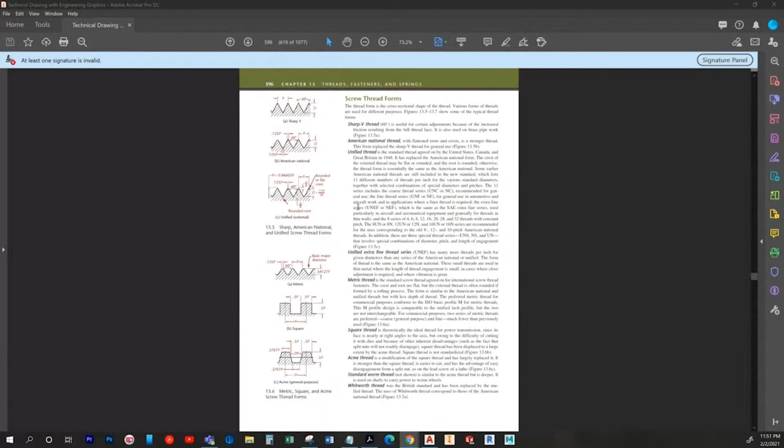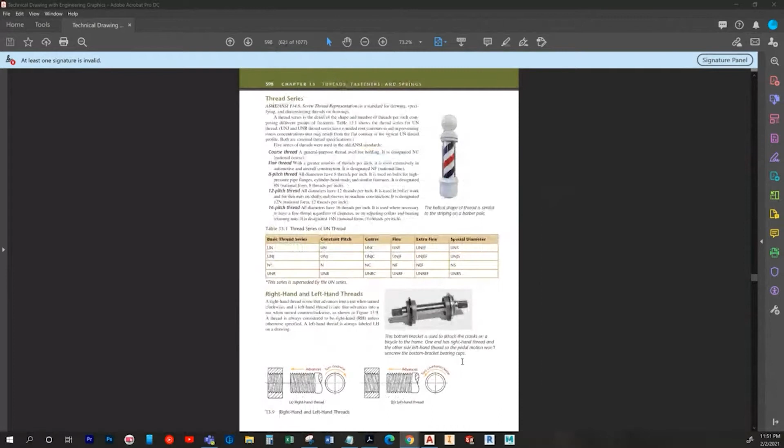So then I'm gonna go ahead and jump down. Basically, the principle is you're gonna have a pitch, and it's determined by an inch divided by the amount of teeth, which is given in the thread note. And I may have scrolled past that already. Let me take a look here.

Okay, so if you look here on page 604 - and it's probably best to specify this is the 15th edition book, so it's the newest one - you've got threads per inch listed here in the diameter, and that's pretty much all you're going to need to draw it most of the time. But there are other modifiers that matter, the class of fit, of course, blah blah blah - I have a video on that too. But for our intent, what we're going to do today, we'll just need the major diameter, threads per inch, and if it's left hand or right hand.

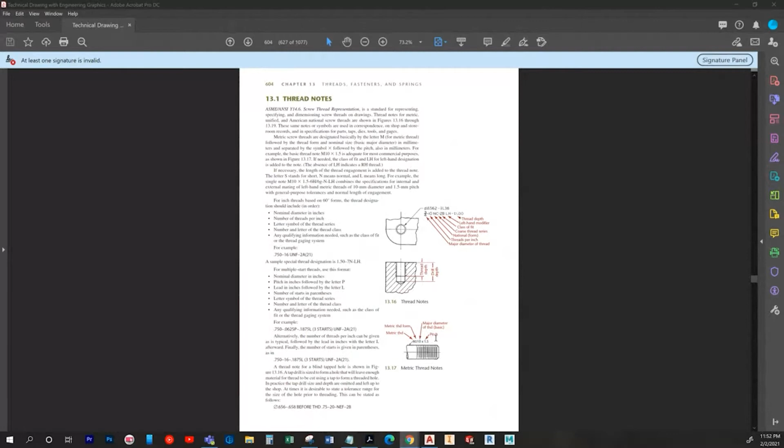And then there's a metric one broken down here as well. Now to go back up, this is pretty much just the gist of what it's going to look like. I don't know why in the book they wanted to flip it the other way and make it a little more stressing. If they would have had the 0.5 over here and the P over here, it would have been great. But I think they were trying to, since you read left to right, let you read what the actual lines look like first. But to me it just confuses it up.

But the principle here is on a standard screw, like a single thread or even a 3-start thread, a triple, you're going to have a profile drawn, and that same profile will be copied and pasted straight down. So then when you look at like a 2, or I assume a 4 if there was a 4, it's going to be the opposite - you're going to have a profile drawn up here, and then you're going to mirror it down here. So it really matters a lot about placement of these profiles in addition to drawing them.

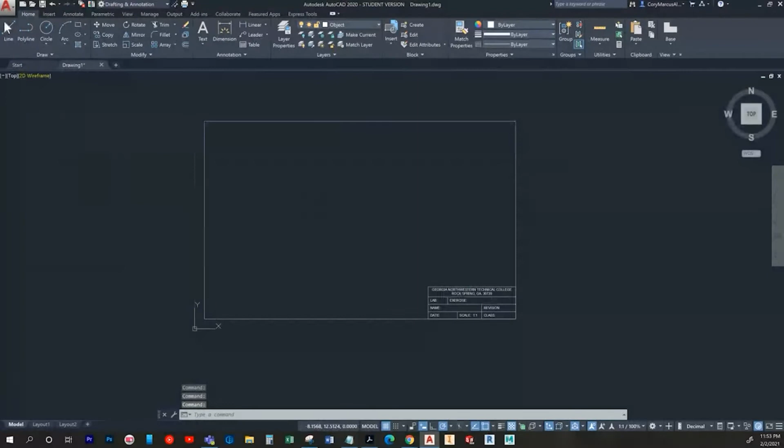And then after that, you're pretty much just connecting the dots. So let's go ahead and open up an Imperial template. I'm going to kind of just ballpark some values here, but the general idea is going to be the same regardless. So let's see, first of all, I'm just going to draw on a pretty good spot in the page.

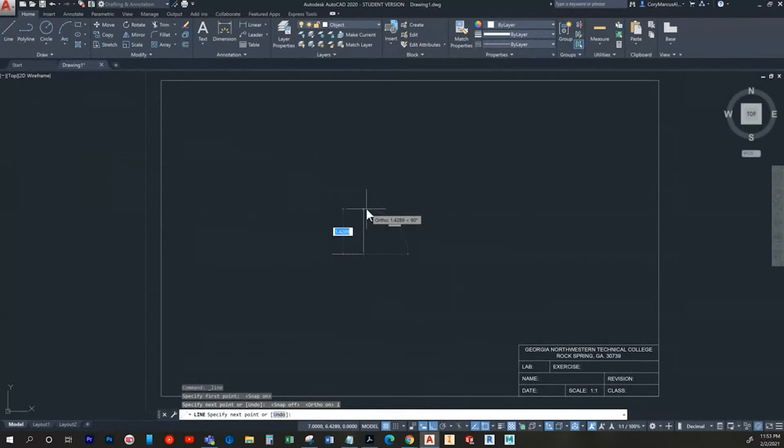And let's make it have like a shaft of 1 before we actually get to the part itself, and I guess like 2 inches by 1. So I don't know how some people draw the little breaks in a screw, but what I like to do is take that value of whatever it was - oh, you know what, I'm on the wrong arc.

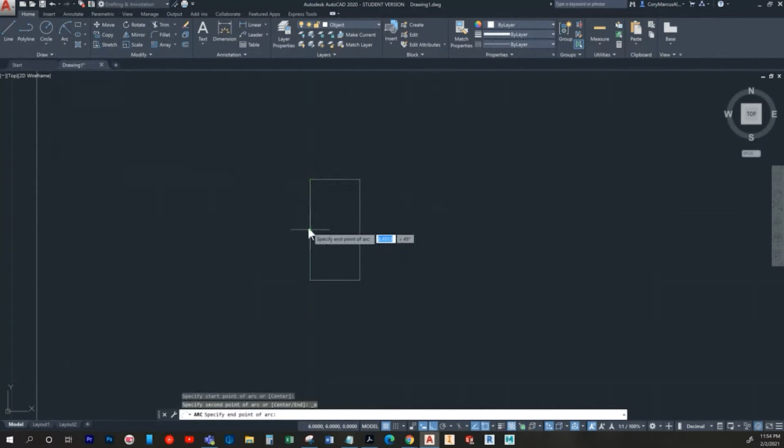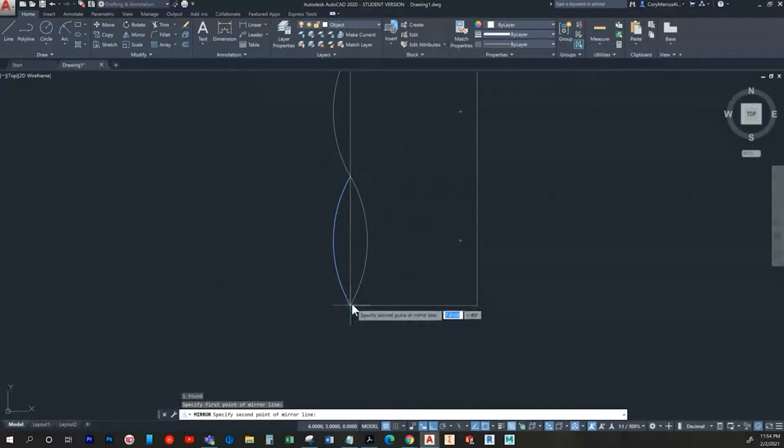Okay, so I'm looking for start and radius. So what I like to do is take the radius value of that thing and use it - that way it has like a perfect transition. And then just mirror this one down here, and you can delete this line out. Then later we'll hatch this portion. But basically, yeah, that's just a smooth break because the transition is not sharp.

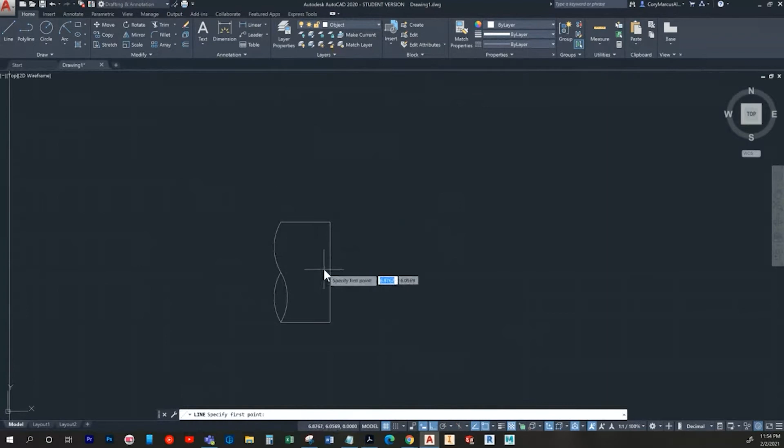Now there's probably a better way to do that, but this is the best I've found, and that's just a guess really at what's the standard. Okay, so let's do like a 4-inch length. And what did I make this to? We may as well just make it straight across.

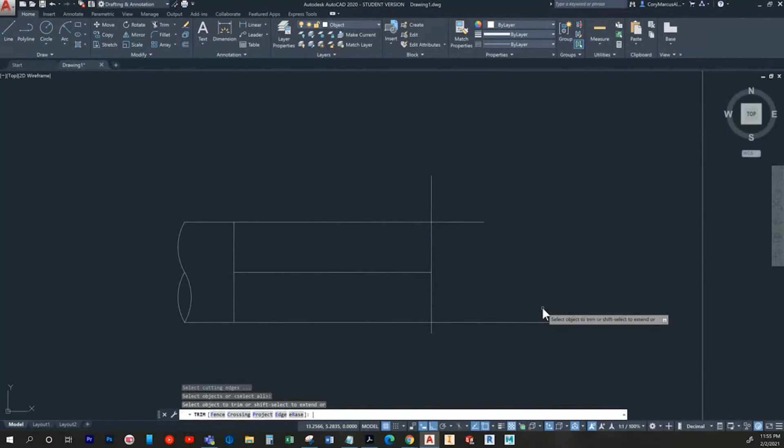Doesn't have to be, but for this one we'll make it this way. So I'm going to go ahead and trim and delete the center line that I made.

So I need to determine the thread pitch, by the way. Let's go ahead and do a generic note here. So what I'm gonna do is... let's see. I don't want it to be too small.

Okay, how about we do 4 threads per inch? Let's see how that looks. Or no, let's do 6. 6 TPI, threads per inch. Right hand, and yeah, that's pretty much it. You already know the diameter technically, but I'll put it down here. 2Ø. Okay, so that's my own note.

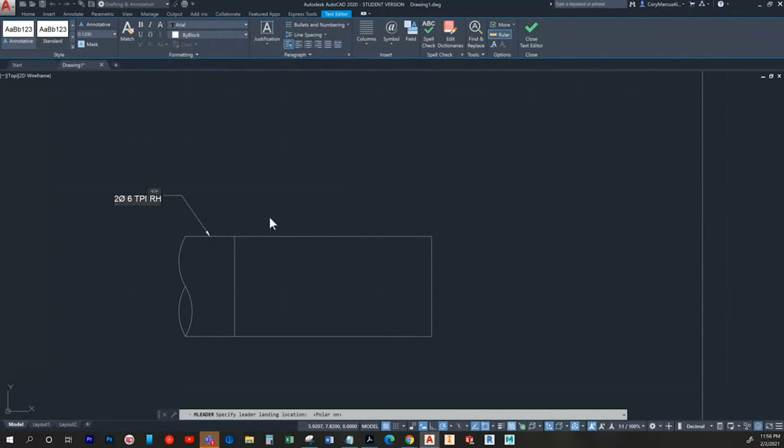Obviously, this is not proper nomenclature, but it lets you see what's going on if you're thinking about it. So anyway, I'm going to do a calculation here, first of all, and it will be 1 divided by 6.

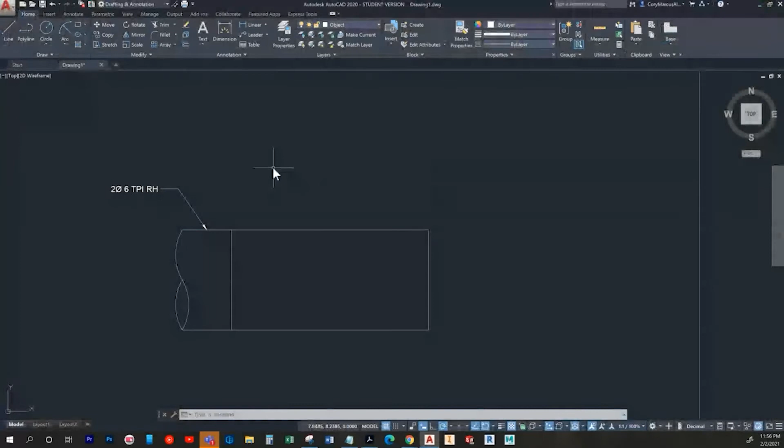So we'll do a couple decimal places. So we'll do 1.6667. How about that? Okay, and then I'm just going to... oh, bad maths. 0.16667. Okay.

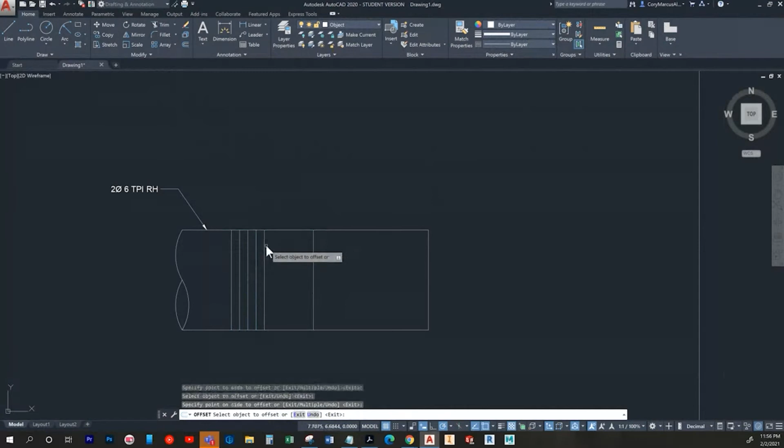Some people offset the lines outside of the screw so it's easier to delete, but I kind of like it being here. To me, it's a little easier not to get goofed up. That one seemed to line up perfectly, so.

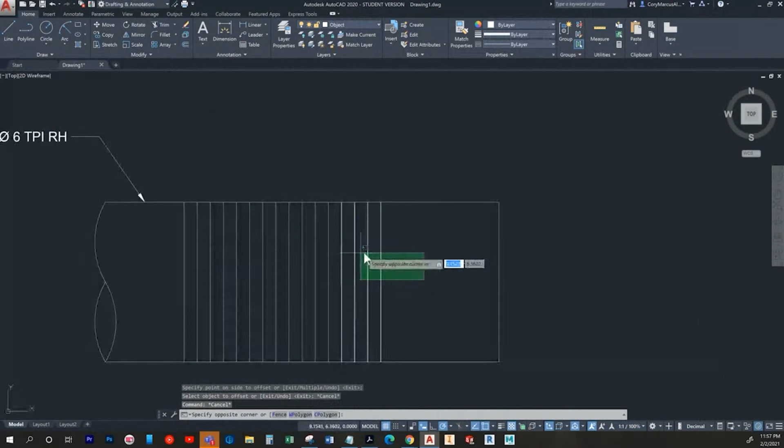Lots of these guys. I really don't need them. Honestly, I'm probably just going to delete them all, but it's fine.

So then what you're going to want to do, really I don't need that, is to draw the line connecting the two ends of that pitch. Make sure that you've got your snap set to 30s. And then once you get that snap, go ahead and draw.

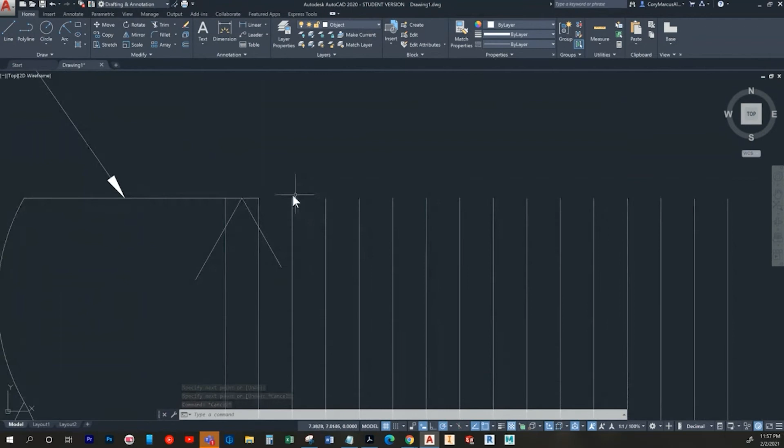And so that's going to be our minor diameter right there. So then... you know what? I think I've already blew it on my end. Let's see. Yeah, so, okay, I'm good. I was thinking that maybe it started at the middle, but it starts here.

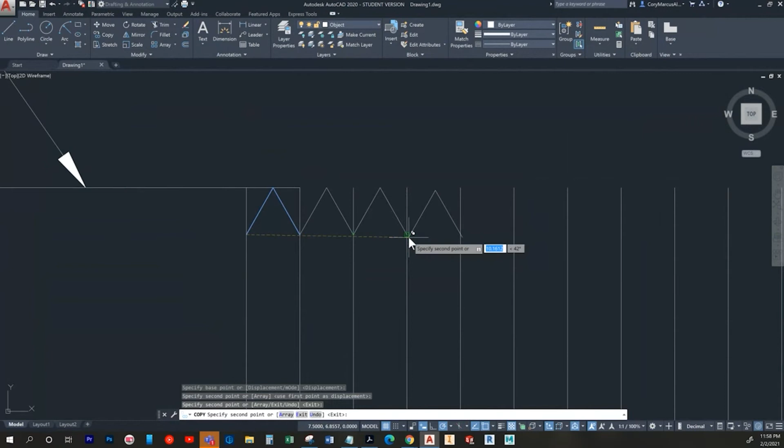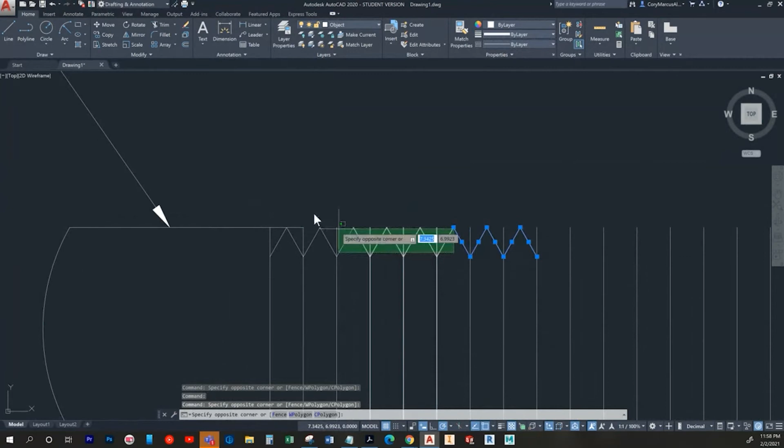So anyway, I'm going to trim. And then all I need to do is copy it. Might as well get a bigger selection here. And let's do the same thing one more time. You know what? We'll just do it the quick way. Hold Shift to deselect.

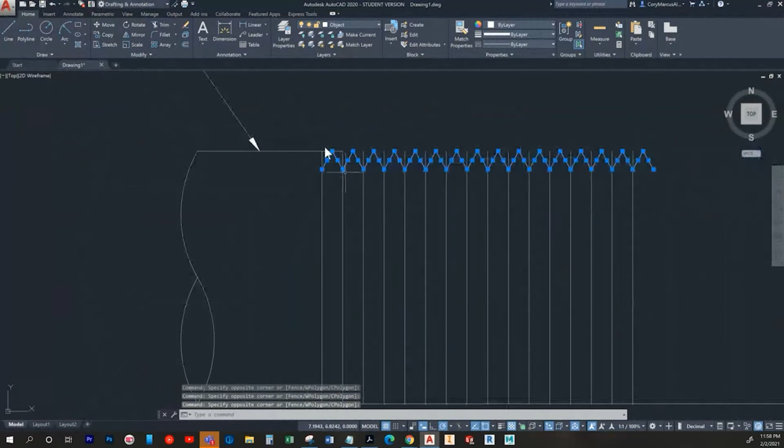Okay, so now if we look back, it slopes up and it slopes up. So this is what I was talking about earlier. All you need to do is just copy everything and move it straight down to the bottom.

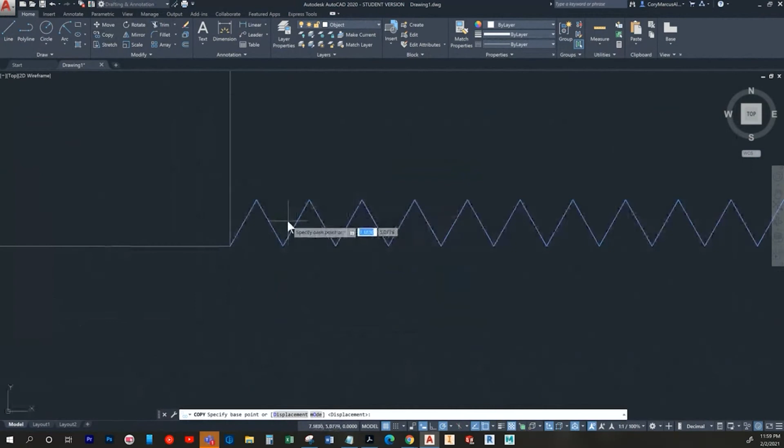It actually needs to be longer still. I didn't realize that. Okay, no biggie. So we'll just copy this whole batch. It's kind of a long screw. It's fine.

Let's shorten it by an inch. It seems like 3 is plenty. Can't tell if it's the same ones or not, but we'll find out. Oh no, I blew it. Okay, no biggie. We don't need that many anyways.

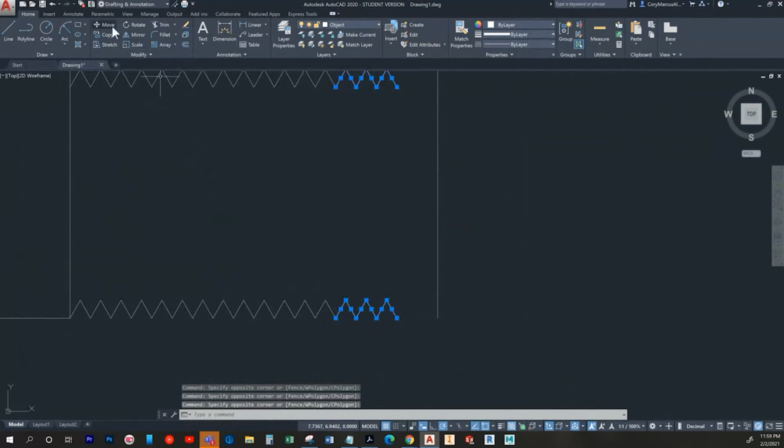Alright, so I'm going to delete this guy and that guy. And I'm not even going to bother to trim that right now because we're going to end up having a chamfer on this one. So if it's going right-handed, it's going to basically travel this way, and if it's left, it would travel this way.

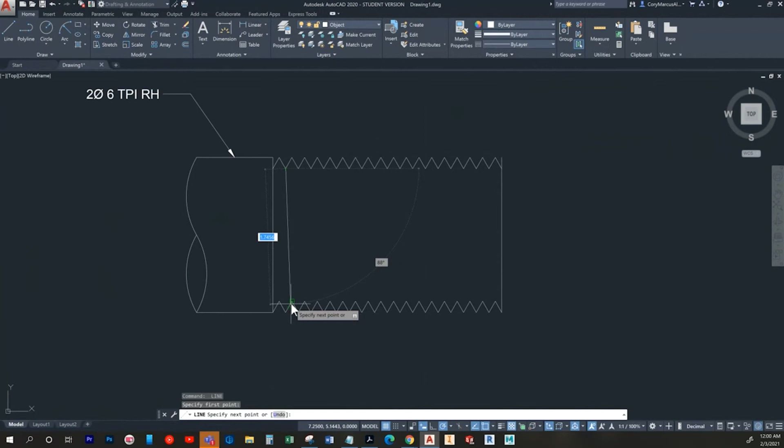The reason being, say I had a bunch of these lines like this, you can kind of tell if you're thinking about it. If this is rotating clockwise, it's going to be traveling along this path, getting further into it. Basically, it's literally traversing and digging deeper into it. So of course, this would be progressing forwards, which is the concept.

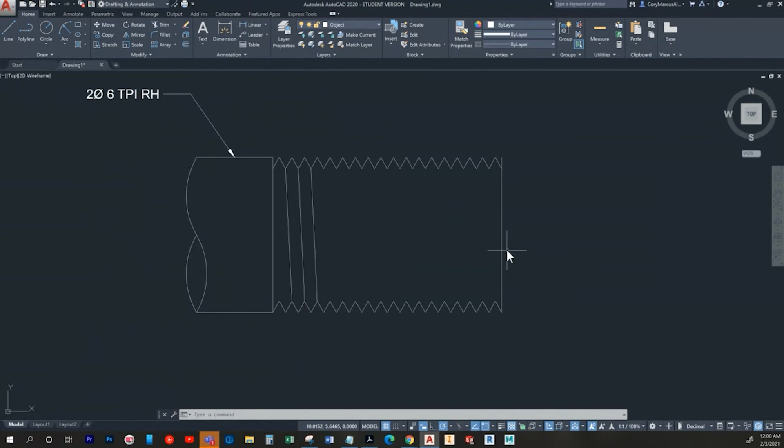So yeah, it's going to be positioned just like this.

So it's a pretty straightforward process. You're basically going to connect. Okay, let's look over here. Basically, this top point, you're going to connect it to the top point on the bottom.

If you were to draw a line straight down, you're going to be touching the point on this end, but then it'll be at the bottom here, and you need to actually connect it here. So technically you have the end here, but you can't see all of that. If you move to the next one, straight down is here, so you move forward half a pitch.

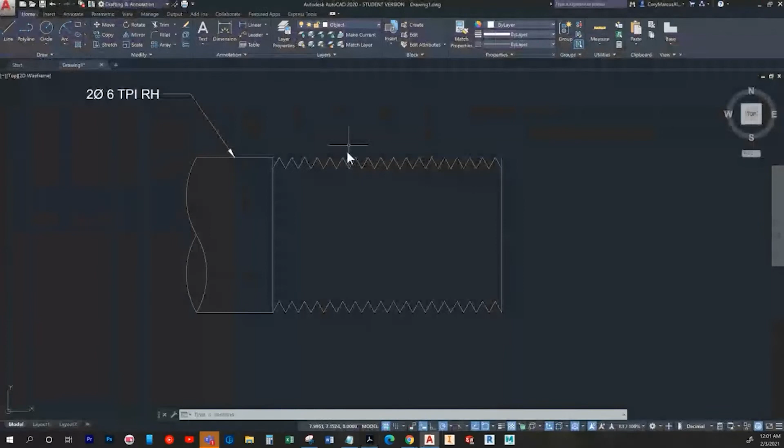So in this one, I could draw a straight line down. I can see that's where it would be. So this is where this one would connect. And the same concept applies with the roots as well. You're going to connect those in the same process.

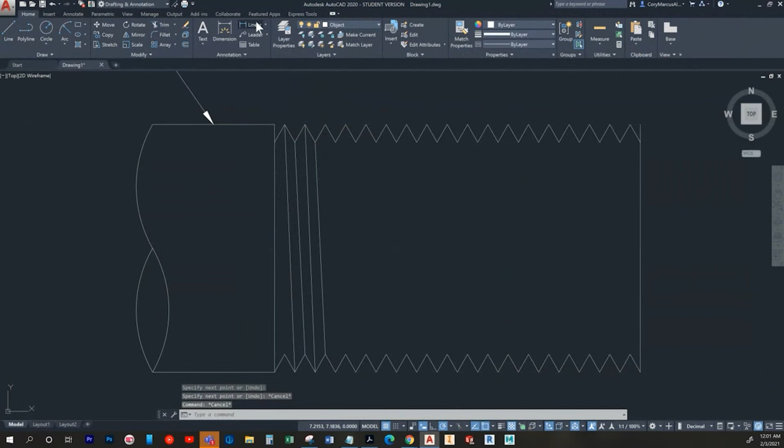Usually what I like to do—this one's pretty easy, so it's not really a scary one, and it's pretty easy to tell if it's right or not. But the best way to fact check and see if you're right is to dimension.

From that straight line, basically, we've got 0.0833, which is half of that 0.1667, whatever it was from earlier.

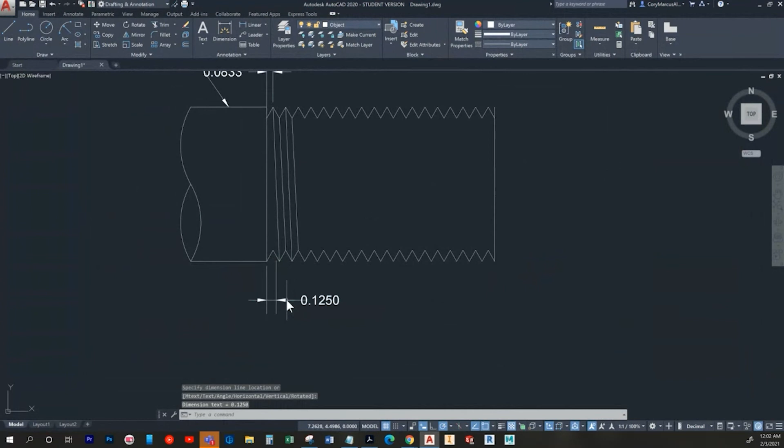From that same line, I can go to the bottom one, and you see it's—that was a bad click, guys—but you can see it's double that. So we have half of the pitch and the actual pitch.

So basically all you've got to do to fact check these is literally just measure from the start to the next one and see if it lines up. Your lead should always match this formula, and your start always should match that. Obviously your slope is the same way.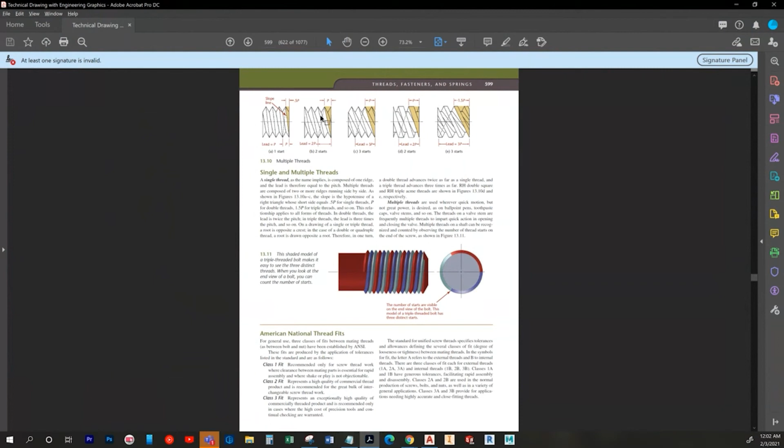So this is just on the back end. It's a hidden line for a reason. Basically, you could measure this on either end of the spectrum, but we've already measured it. It works out, so there's no reason for me to go and try to draw all of this again.

I'm going to do the same thing, just copy it across as we go. Oh, I think I pasted it a little too often there.

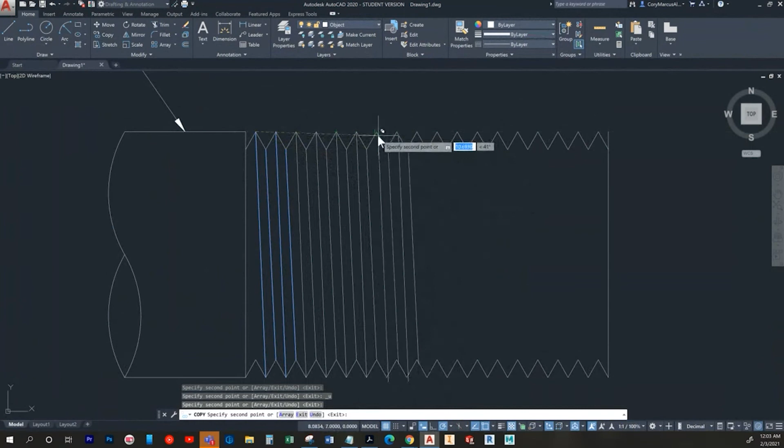Okay, so now I need to copy for this little portion right here. So I'm just going to copy. And this one's great because you don't have to do any trimming outside of the profile.

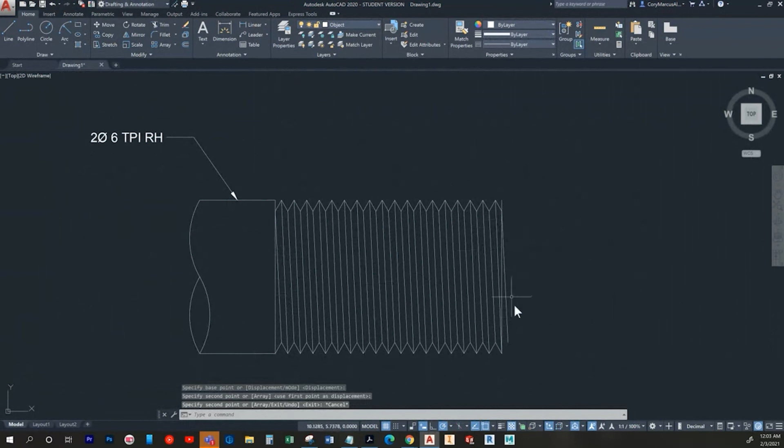One thing—it's not mandatory, so you really just have to see what the thread calls for—but sometimes you may have a chamfer on the end of it. Like this, it's traditional looking, pretty basic. If you do have a chamfer though,

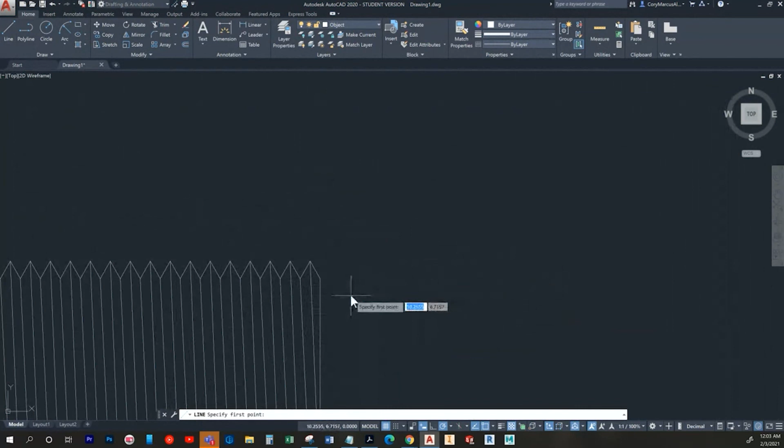draw a straight horizontal line from that minor diameter on both ends. Then at the end of the part where it meets that line, draw a 45-degree line and just trim the excess. Pretty straightforward concept, works pretty great in practice though.

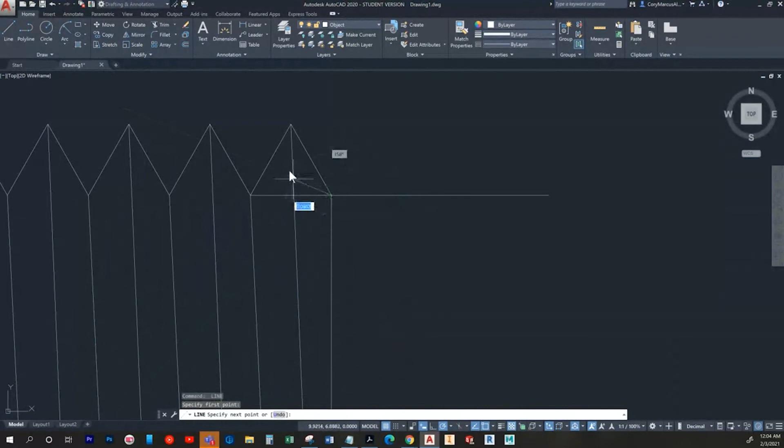So now I'll just trim, delete this guy. And there you have it—you've got your chamfer. The only thing left to do is just to hatch it.

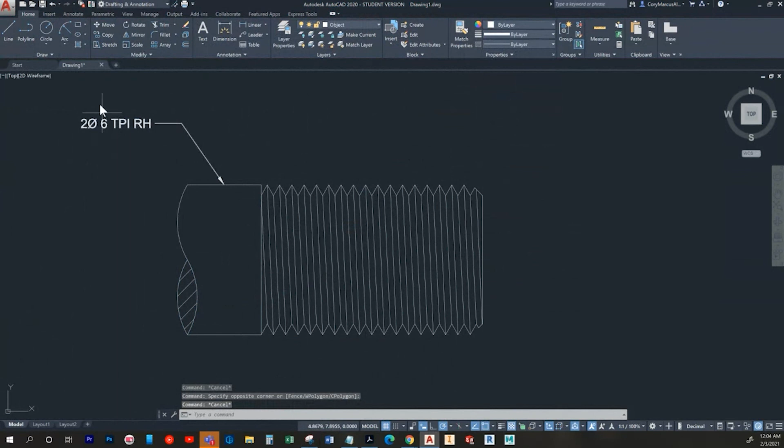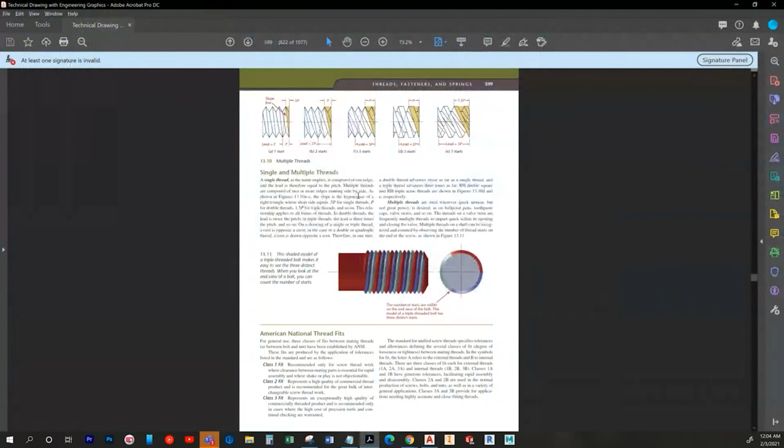Yep, so if you go and you look, we have 1, 2, 3, 4, 5, 6. You know what, I think I measured that wrong. Yeah, okay, so you're supposed to include 1, 2, 3, 4, 5, 6.

What? Oh, because it's to the midpoint. Yeah, so you've got half here. So you got 1, 2, 3, 4, 5, and then half plus half, so that's 6.

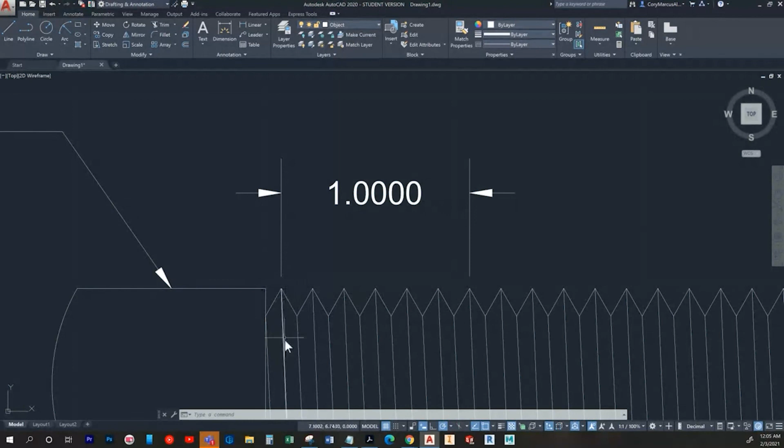But yeah, so there's your threads per inch. Obviously the diameter is the same as this, and you got your chamfer. So it's pretty straightforward. The next ones will be worse, but obviously, this is a right-handed thread.

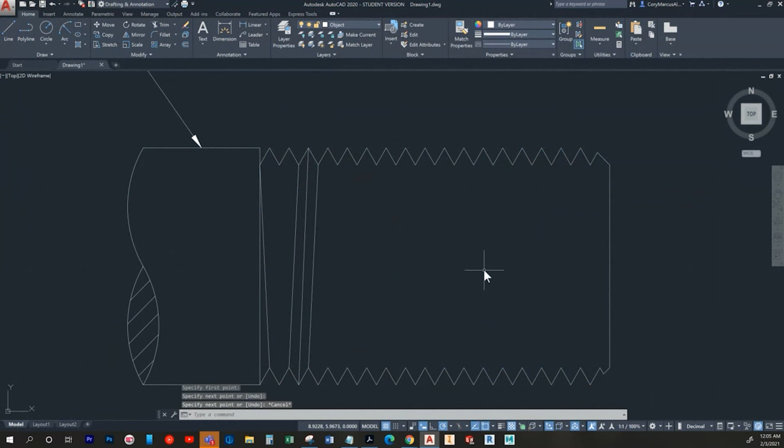You could practically mirror this to get the left hand, but the only difference would be it would be going the opposite direction. So if that were the case, you would just be going from straight down this direction—that's the only difference. So pretty straightforward. I don't expect you guys to have much issues with these.